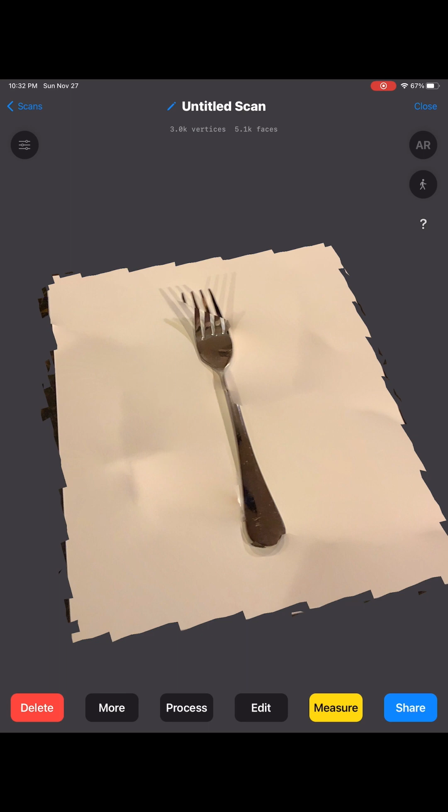Oh, this is cool. Kind of some sort of RoboCop view. But it already looks like maybe not a fork shape. Let's see what it looks like once we texture and process it. Ooh, yikes. Okay. It doesn't look like something that we're going to be able to use.

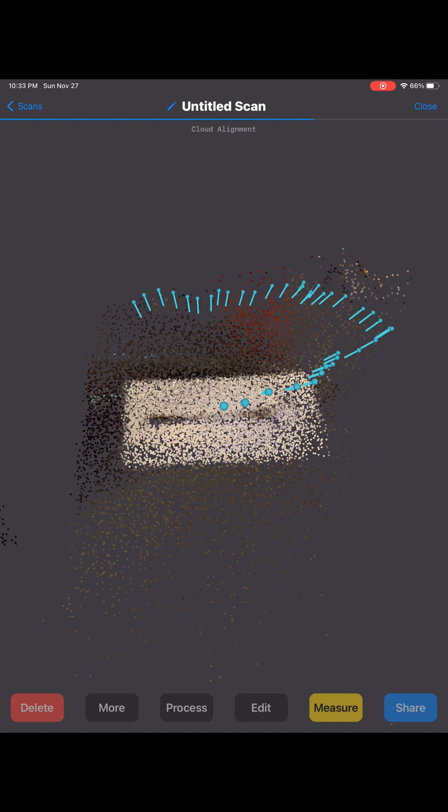We also have a front-facing 3D scanner, which they call True Depth, but it's the one used for Face ID. So let's see if we can use the front-facing system to get an image. Okay, it looks like it's doing something. All right, it definitely seems like it got a bunch of points and it's trying to do something with them. Let's see what it looks like from a 3D model once it's done processing here.

Okay, a little bit more 3D. Definitely doesn't seem like it's good enough. Okay, that didn't really work. The LiDAR scanner on the iPad works well for room scanning and maybe some large objects, a car, a couch, but it didn't work for a small object.

It looks like maybe a few millimeters of resolution is what you can get out of the LiDAR, and the structured light sensor on the front of the iPad didn't do much better. I think another problem is that these are very shiny, reflective mirror finish, and something like a LiDAR sensor is going to bounce light off in a way that it can't really get a good depth and distance.

The other thing I realize is for the silverware tray, we're going to stack silverware vertically. So we don't really need a perfect 3D model. We just need a great top view outline. So there's another sensor on all of our devices that might do a much better job, and that's the actual camera. So let's go figure out what we think the resolution is that we could get out of the camera and take some pictures.

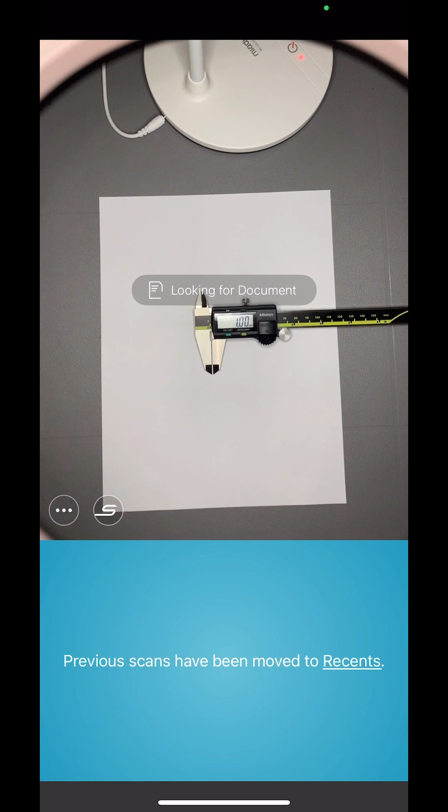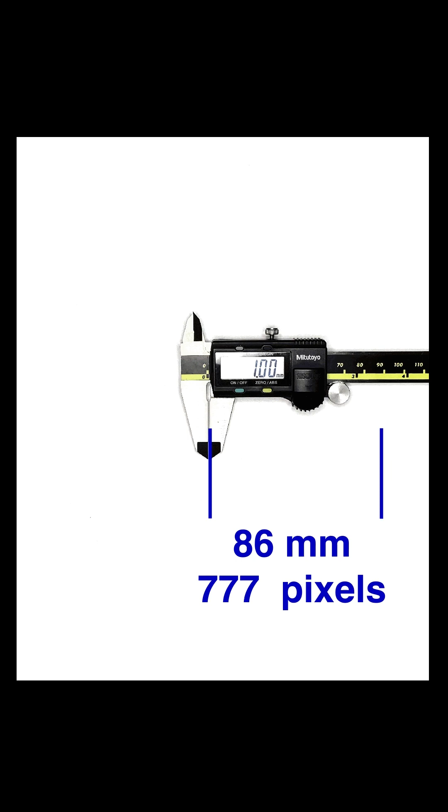I'm using Scannable to take this picture because these document scanning apps take care of a bunch of cropping, fisheye correction, and perspective for us, and output an image at the maximum available resolution. Even though we didn't fill up the whole camera and we didn't use a tripod, you can see that the pixels are able to give us a resolution of close to 0.1 millimeters, which is plenty for what we need.

Let's take a picture of the fork now. The ring light helps to get rid of the shadows, and I'm taking a picture from directly above the tines because they're the highest point, and we want to eliminate all the distortion possible from perspective. Okay, this is looking really good.

Shapr3D on iPad is super awesome for fairly simple models like what we're going to do today, and they've been adding functionality. So if you have an iPad and Apple Pencil, I highly recommend it if you're going to be making 3D models for 3D printing.

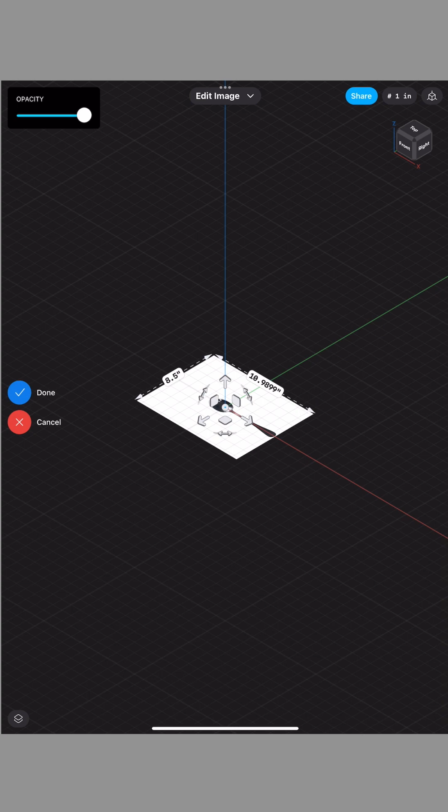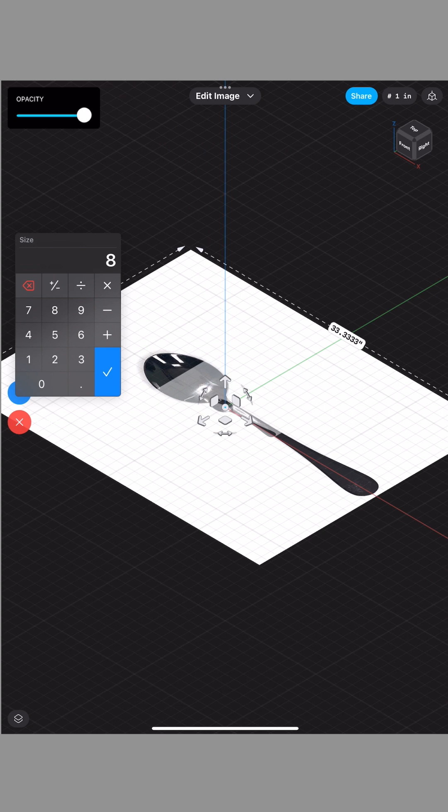One nice thing about using a document scanning app and putting your object on a piece of paper is that the app knows that it's 8.5 by 11 inches. And so if we type 8.5 in Shapr3D as the width, you can see it comes in as 10.9899, basically 8.5 by 11, which means that spoon is actual real size in CAD now. And we don't have to do any other measuring to figure out how to get it scaled properly.

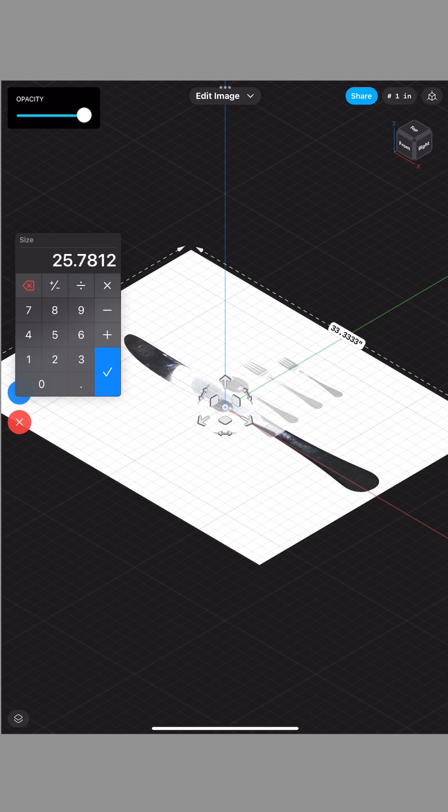So let's pull in all the rest of the images. These images come in on the XY plane, so I can space them out and then double click on one of them so that we can start a sketch. The first thing that we want to do in the sketch is to create a midline that we can use to mirror the symmetrical ones for the spoons and forks. So we're going to use the midpoint of a couple of lines that go all the way across the width, and we have to turn off all the snapping so that we can pick any point we want.

These points that I'm creating end up floating in space. They're not constrained to anything, so it's a good idea to lock them before you try and apply any constraints. For example, if you're going to try and make something perpendicular, both lines are going to move if one of them isn't locked down to something. So you'll see several times through this, I lock the points and then I end up extending these lines so that they go all the way to the end of the implement.

Now we get to start actually tracing. So we're going to use splines for this, set to fit. So all we have to do is press hard with the Apple Pencil, drop a point along the perimeter of the fork, and it's going to automatically fit a curve. And then we can always go back and adjust. So don't worry too much about getting it perfect right away.

I'm going to set the control point for the end of the spline onto a perpendicular line to make sure that when we mirror across, it's going to be continuous. And then we're going to go back along and look for any places where either the control points should be adjusted or the actual center point on the fit curve should be adjusted, and we can get rid of any gaps along the perimeter.

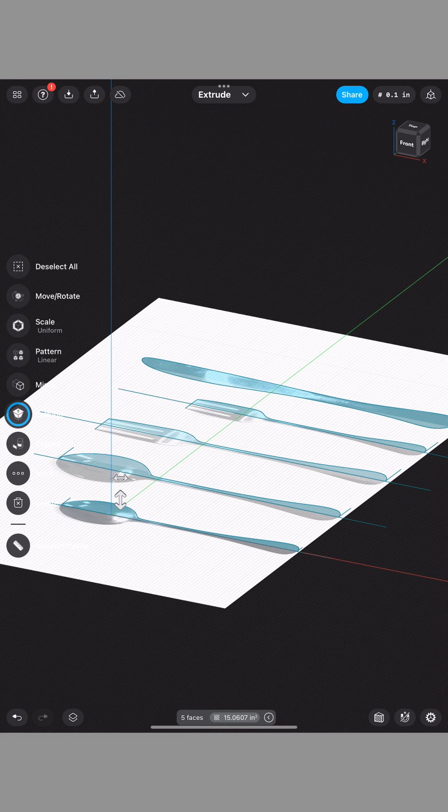All right, now once we have the closed curves on this sketch, when you go into an isometric view, you can click on any of those blue faces and start to extrude them up and turn them into 3D shape. And then we're going to mirror them to make a solid body that represents the cut that we want to make out of our tray. The center line makes a nice flat plane when we extrude it, which gives us something that allows us to align the different utensils orientation north-south.

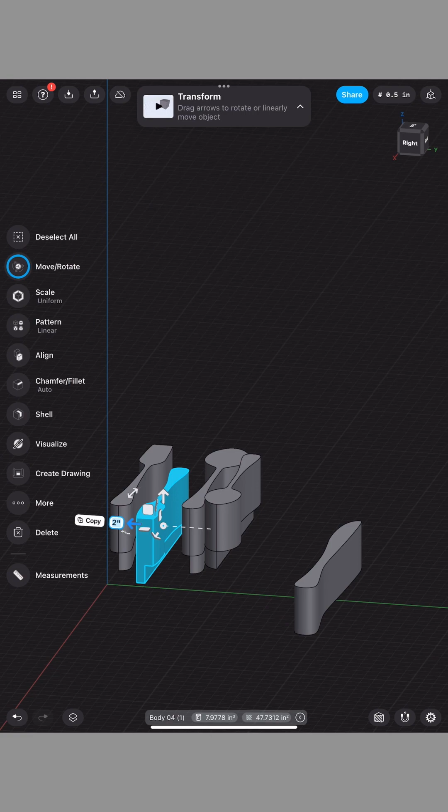And then we're going to organize them in a way that looks logical and draw a box around, extrude that up, subtract these solids that we made, and we've got a silverware tray. We need to add some clearance here. So after I do the subtract, I'm going to offset these faces 1 millimeter back. It's probably not enough, but I want to see how accurately we did on the tracing.

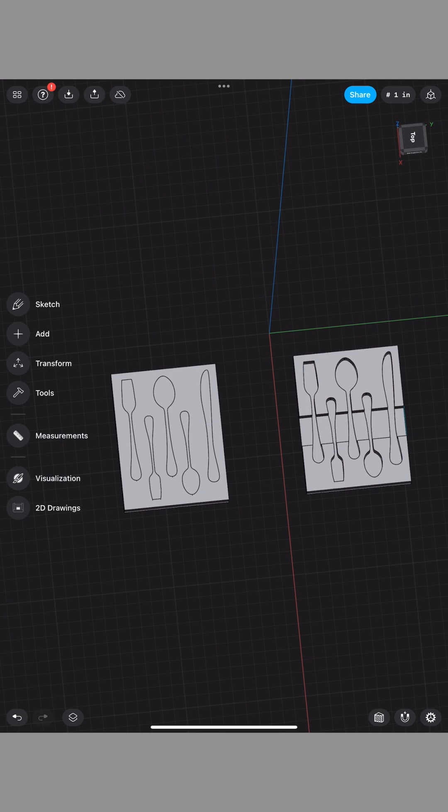After that, we're going to make a recess for you to be able to get your hands in and try and grab these, and add some blends for comfort. Sometimes these 3D prints can be pretty sharp on the corners. And let's pull it over into Prusa Slicer and see what it looks like.

I'm going to use a Prusa MK3 Plus, which is a great little printer, but I'm realizing that it's actually too small for the size of this model. So let's see if we can pack this a little tighter and get it to fit on the bed. Okay, let's import this and see if we got it. Yeah, so it's about 5 millimeters clear on all sides of the bed. And let's go ahead and slice it and see what we end up with.

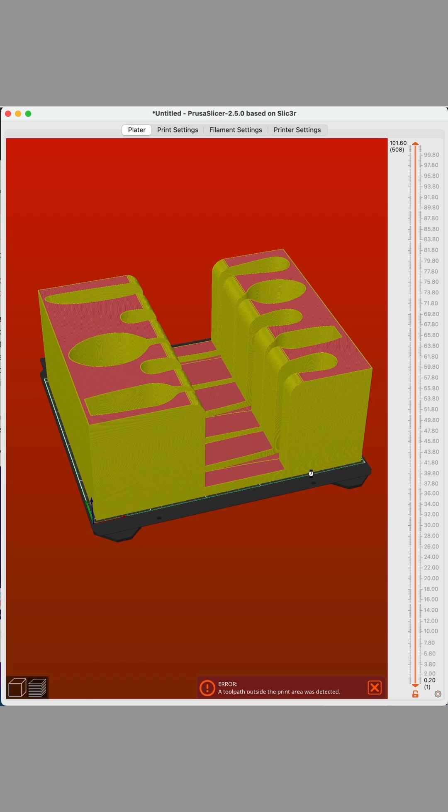So the slicing is probably the most important thing to be able to end up with a good quality print. It's showing an error here saying that there's a toolpath outside of the acceptable area for this printer. So the part fits, but there's what they call a skirt. There's like a couple layer border that they normally want to print around your parts. I think it's to make sure that the plastic is flowing well and that the Z height is about right all the way around where you're going to be printing, but we don't have clearance for that. So let's go turn that off in the settings.

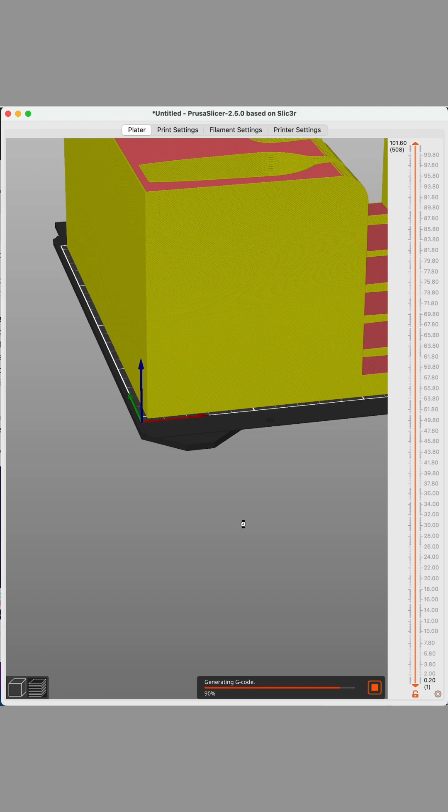Okay, the slicing completed without any errors. Wow, almost 3 days of printing time. And let's go look. You can see some more details around how many grams of material it's going to take, and some more details around the timing.

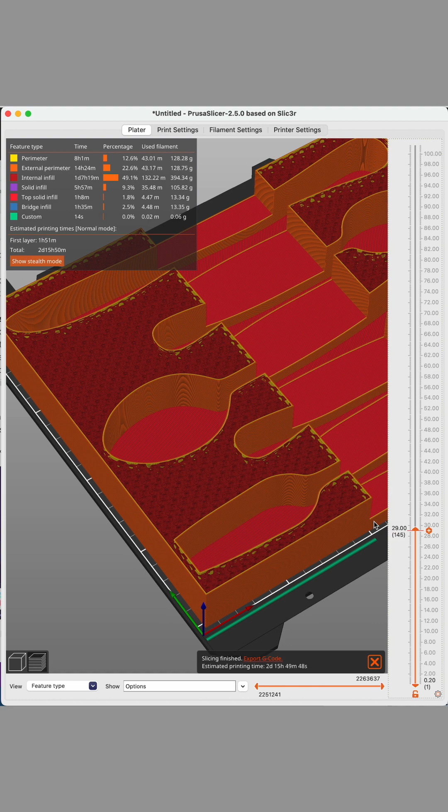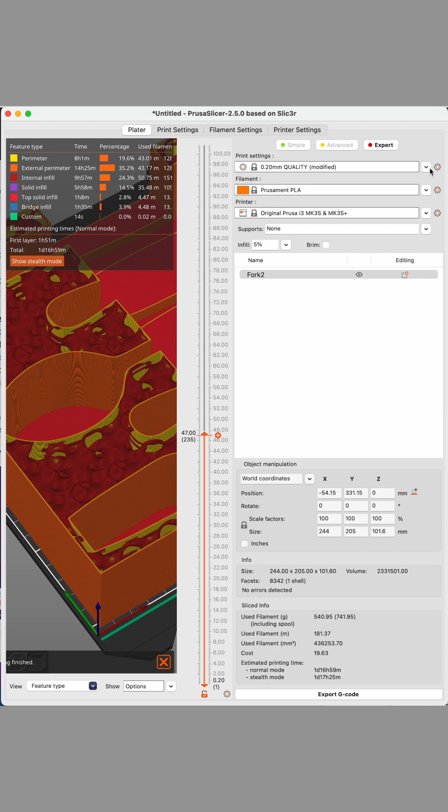There's so many settings here. It takes a little while to figure out what they're going to be, but it's not just, do I want to print at a 0.2 millimeter or a 0.15 millimeter height? There's how does the infill, which is the areas inside the solid object that make it so that it's not completely solid plastic all the way through. There's settings around the thickness of the top and bottom and how many perimeters are going to be printed.

It's pretty fun to dig into it. It can be daunting, but you can have a huge impact on how much time your print is going to take. So the first thing I'm going to change is the type of fill pattern. So gyroid takes longer. It's really cool looking, and it has uniform properties in all directions. But for this part, I think simple grid is going to be plenty strong and faster to print.

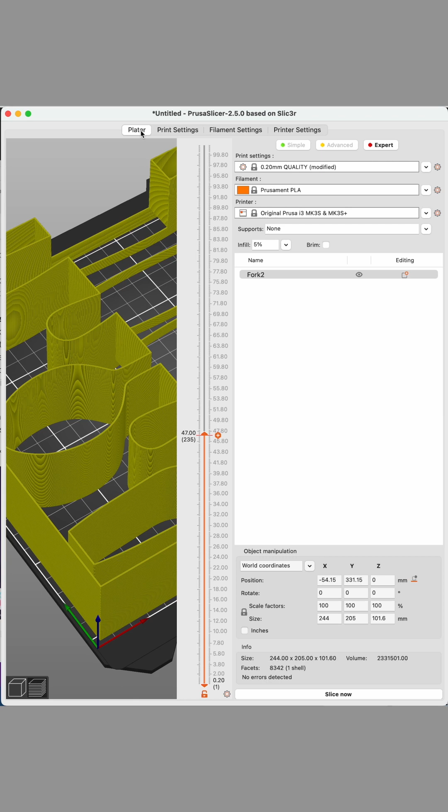The other thing I'm going to change is the combine infill. So this means that the infill will be printed thicker and only every other layer so that it can have way fewer tool paths. Okay, awesome. That one change pulled a day out of the print time and quite a bit of material.

There's a bunch of time and material in external perimeters, but those are like the orange and yellow that you see on the screen that are the outside surfaces in XY. We can't reduce those below 2, which is all it's set to right now. So the other thing we can look at is the top and bottom layers, which are a reasonable amount of material, and there's multiple layers there. So let's reduce those a little bit and see what we get to.

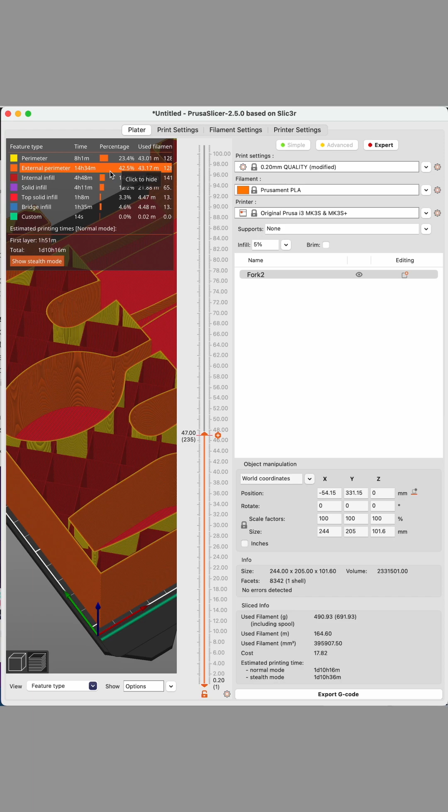Okay, it's still a day and a half, but I think this is probably close to where we're going to end up. So I think I want to do some test prints and then maybe make some additional geometry updates, and we'll go see how we like it.

For the first test print, I took a slice out of the middle of the CAD so that I wouldn't have to print the whole thing. And I've already learned a few things. All the pieces actually did fit, but you can see that they get jammed pretty easily, and they definitely need to have quite a bit of lead in to help them slip into the slots.

So for the second test print, I added a little bit more detail and had a floor on the bottom of it and some lead in on the top. What you end up seeing is I must have made a mistake and eliminated the clearance that I had put in. So the larger ones didn't really fit, but I was still able to learn about how they slip in, and it gave me some more insights. And I was able to go from there to update the CAD and prepare for the full show. So here goes.

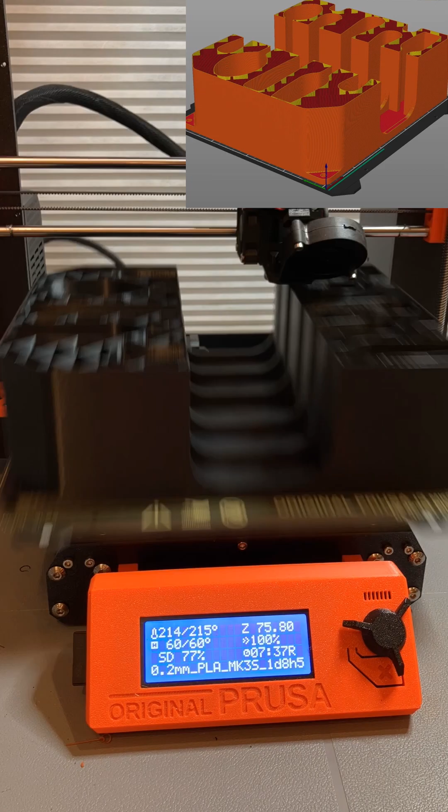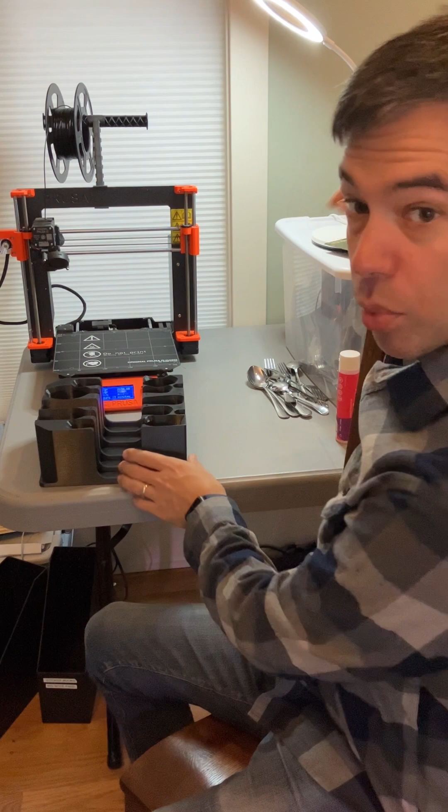All right, it's done printing. It's amazing how a day and a half can feel like 30 seconds. Here we go. Moment of truth. We're going to bend the platen here so we can get it to pop off. Well, that was pretty easy. The print looks like it went really well. Here we go. It's got good profiles of all the silverware.

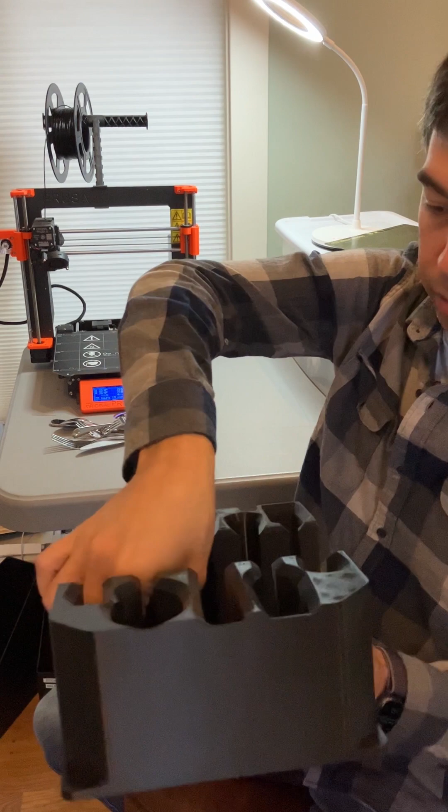Here's the big spoon. Looking good. Small spoon. We'll see about that. Yes. Like it. Small fork. All right, those are in there. All right, small spoon seems like not 100% success because it can get jammed going in there. We're gonna have to see if we like this, but otherwise, seems like it's working great.

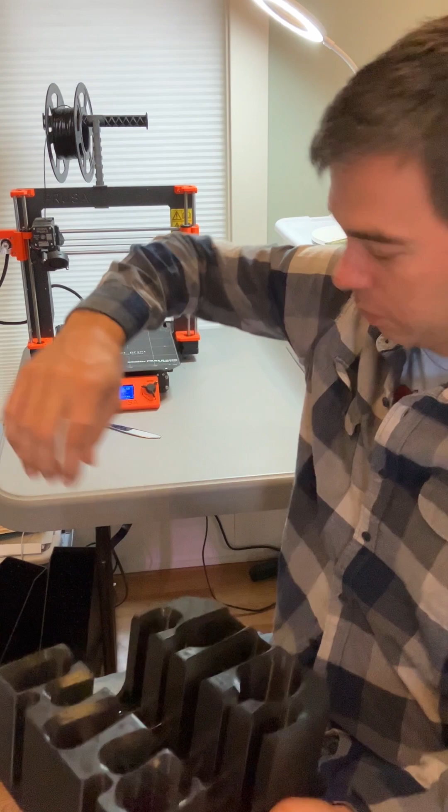All right, let's go to the kitchen and see if we can load it up. Okay, this is the moment of truth. We have the 3D print. We have the drawer. You can see someone has spent the time to meticulously stack these in here, but I think that the tray we made is going to make this a lot easier. So, first of all, it does fit.

These drawers are really deep. I built these cabinets during COVID, and I wanted to make sure that you don't have the problem where you can't get the drawer to close because everything's kind of packed in there. So I wanted to take advantage of that full height to make big stacks here. One of these clearly has been used to serve ice cream and is a different shape than the rest.

Yeah, that's about as many as you probably have put in there right now. Okay, so there are a few more in the dishwasher, so this will fill up a little bit more, but that was the idea, that you got all your silverware here, you need a spoon, you grab a spoon. I mean, it's basically a silverware tray.